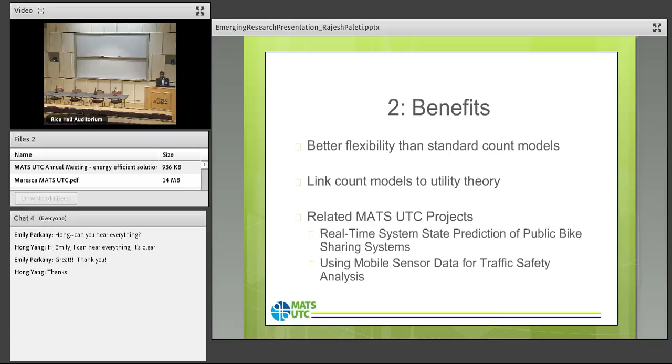One is a bike sharing project that is starting, where we are trying to predict the demand for bike sharing facilities in real time, which is the number of departures at each station - a count outcome. We also use these models recently for developing crash frequency models for the Hampton Roads region and another UTC project that we finished recently.

The last case study I wanted to talk about is errors in survey data. Survey data forms a key component of all travel behavior analysis, but as we all know, it is not accurate. Either unintentionally or intentionally, respondents might provide wrong data. And if you don't account for these intrinsic errors in the survey data, all your model parameters are most likely going to be biased and can then lead to wrong policy implications.

So there is a way to correct for this misclassification error. For instance, let's go back to the example of choosing between a gasoline vehicle and an electric vehicle. It is possible that the person in reality chose a gasoline vehicle, but in the survey response they reported it as an electric vehicle. Similarly, the person actually chose an electric vehicle, but in the survey response it was wrongly coded as a gasoline vehicle. So these are false responses or misclassifications.

You should account for these possible biases and errors in your survey data when you develop models. For example, this is a matrix of misclassification. The diagonal elements in this matrix show the probability of correct classification - so there is no error. But the non-diagonal elements show misclassification. There is a method to retrieve the correct parameters of your models if certain conditions are met.

What are those conditions? The probability of correct classification in the data must be greater than the probability of misclassification. What do I mean by that? For instance, if the actual response observed in the data is electric vehicles, then at least 50% of those responses must be correct responses. If at least that condition is met, then there is hope of retrieving the correct parameters without any bias.

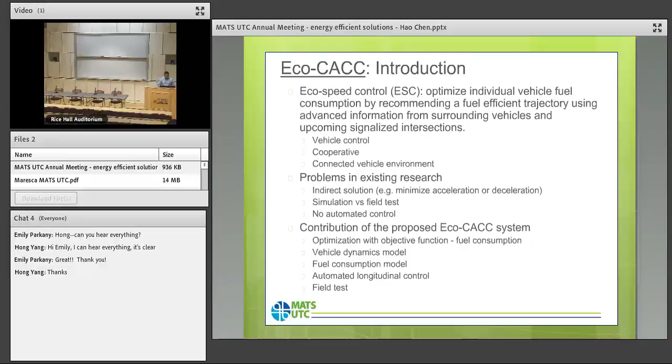For the methodology, we generally divided the scenario into two cases, depending on whether the vehicle approaching the signalized intersection needs to decelerate or not. In case 1, the vehicle doesn't need to decelerate—it can keep a constant speed or accelerate a little before passing the intersection. In case 2, the vehicle has to slow down. This is the focus of this system because it's more difficult to get the solution.

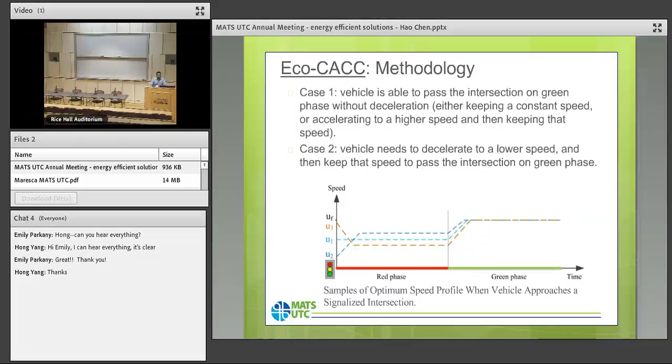We modeled the whole problem as an optimization problem. We have an objective function of fuel consumption, the summation of fuel consumption from upstream to downstream of the vehicle, and we listed those constraints.

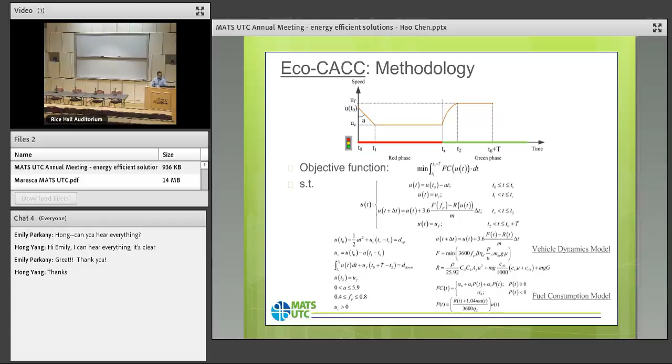I'm not going to talk about the details of the mathematical equations, but generally we have two unknown variables. The first is the deceleration level, which defines how the vehicle will decelerate to a slower cruising speed, and after passing the intersection, the second unknown variable is the throttle level. We use dynamic programming to search the solution space and see all the possible combinations of deceleration level and throttle level to find the optimal solution.

We then implemented the ESC algorithm into the field test. We actually developed this eco-CACC system, an adaptive cruise control system. We considered all the field environment factors, including driver perception-reaction delay, system latency in communication or electronic devices inside the vehicle, as well as data smoothing.

We tested the eco-CACC system on the Virginia Smart Road Connected Vehicle test bed. In this test bed, we have only one signalized intersection, located in the middle of the map, which is a loop. In this loop, we have two directions to approach the intersection, and we considered road grades of positive and negative 3%, which has a huge impact on driving behavior.

So we investigated two directions of driving. For the range to engage the eco-CACC system, we defined 250 meters upstream of the stop bar and 180 meters downstream of the stop bar, for a total range of 430 meters. We define one trip as the vehicle driving through this 430 meters.

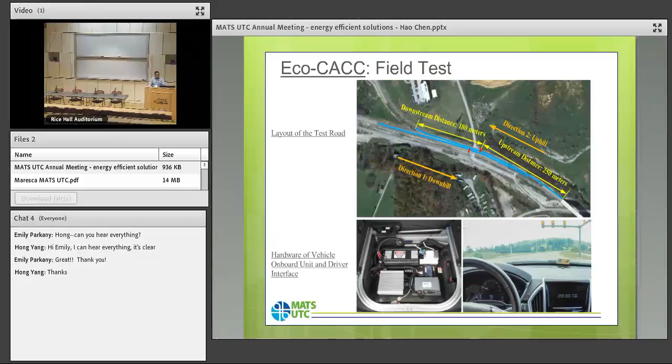We conducted a field test with 32 participants, half male, half female, and each participant completed 64 trips. We considered different combinations of signal timing, with red timing ranging from 10 to 25 seconds, and two directions, uphill and downhill.

We compared 4 scenarios. Scenario 1 is the base case, the uninformed drive. Scenario 2 gives audio information to the driver about the remaining red time of the signal.

Scenario 3 is the eco-CACC manual mode, where we also use audio information to suggest what speed the driver should follow, provided every 2 seconds.

Scenario 4 is the automated driving mode—an automatic vehicle with automatic control of the gas and brake levels. The driver just controls the steering wheel.

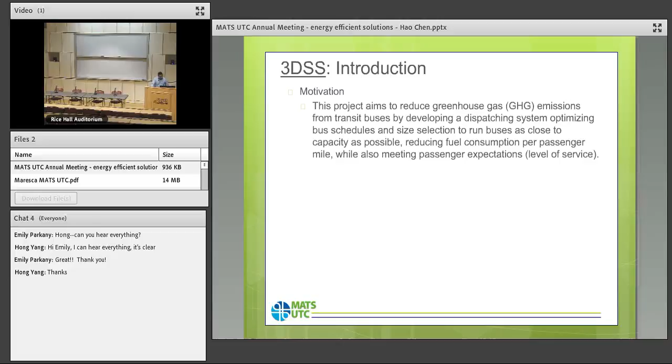The fonts are very hard to see.

We use information to predict how many passengers are going to wait at the bus stop. We use historic data to conduct the prediction, along with bus schedule data, how many buses are available for today's schedule, and how many trippers can be added into the system if needed. We use that information to conduct real-time computation to calculate the level of service.

We provide four different kinds of suggestions: first, adding a bus; second, replace a small bus with a larger bus; third, remove a bus; fourth, replace a large bus with a small bus.

So we provide suggestions to the transit operator. If they decide to accept the decision, it will make a change to the bus schedule in real time.

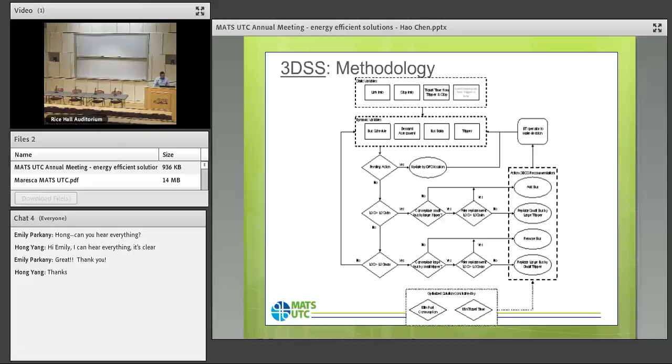We conducted a simulation test because real field tests are very hard—it involves a lot of political issues, since they don't want passengers to suddenly see the bus schedule changed. So firstly, we conducted the simulated test on a bus route called Eastwood A, which is a very important route in VT because it connects the biggest community to the campus.

In the test, we actually used all the field data collected during October 2014, including the bus schedule, ridership data, weather information, and route information—everything.

We divided the test into sunny days and rainy days because performance differs between them. For example, on sunny days generally fewer people ride the bus since they can walk or bike to campus, so the 3DSS is supposed to recommend reducing the bus or replacing a large bus with a smaller tripper to reduce fuel consumption while maintaining the service level. On rainy days it's the opposite, since more people take the bus when it's hard to walk or bike.

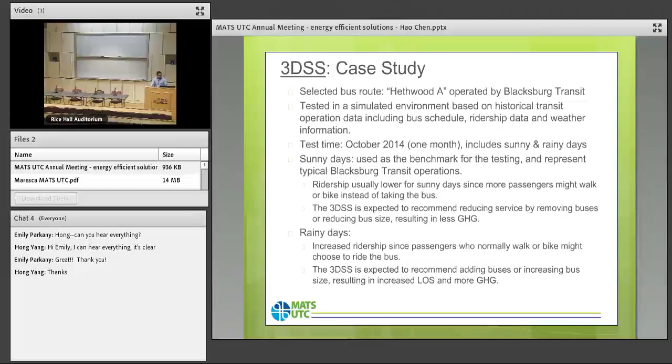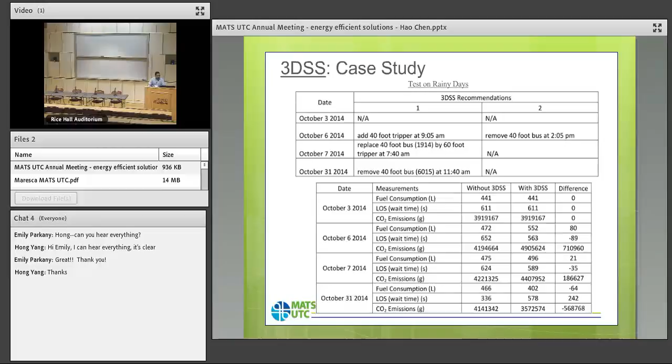We computed the results for fuel consumption, level of service, and CO2 emissions. This is the test result for rainy days—for most rainy days, it suggests adding a bus or replacing a small bus with a larger tripper in order to bring more people from the road onto transit.

For the average result, we got an average 10.6% reduction in fuel and greenhouse gas emissions, while maintaining the service level with average waiting time less than 5 minutes per passenger.

So here we are working with Blacksburg Transit to try to test this 3DSS system on multiple routes in reality, and try to investigate the network impact of the algorithm. That's all, thank you.

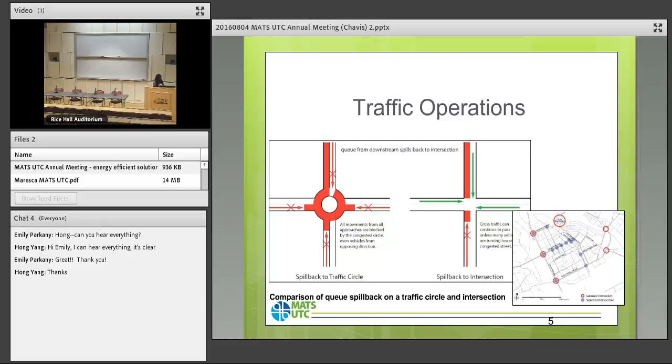I've also, in terms of the macroscopic fundamental diagram, this is kind of a relatively new concept. It had been mostly applied to Western cities, and the reason why it was unique to see if it could be applied to Nairobi is because their street network is pretty limited. And so with the limited street network, there's not a lot of redundancies in routes. So if you're going from one origin to one destination, you don't have a lot of choices in the route that you can take. And so what we wanted to see was, would this even exist in a city such as Nairobi, where there's not a lot of alternative routes?

And so we did this via simulation, and we did indeed find that this relationship exists. The fundamental diagram looks at the flow, or the amount of vehicles you have circulating in your network, as opposed to the total accumulation, or the total number of vehicles on your network. That's a proxy for density. Since the lane mileage is fixed, if you count the number of vehicles circulating in the system, you get a proxy for density.

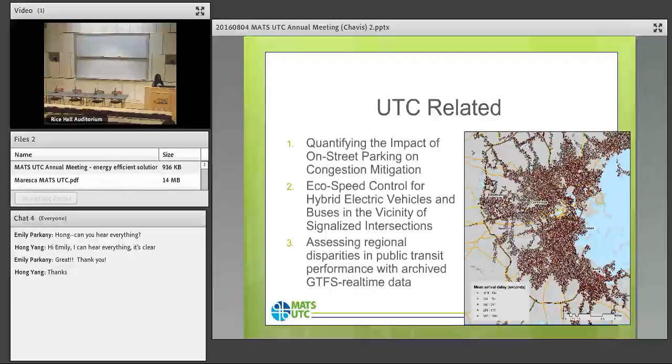In terms of the current study that we're doing, we are doing it with the DC Department of Transportation. If anyone's familiar with the DC area, it's very difficult to park in certain areas. We're looking at the Chinatown area, which is where the Verizon Center is. If you're used to the metro, it's where the red line and the green line have that big transfer hub.

So it's a very busy part of town, and they have been doing a pilot study where they have embedded sensors in the ground at certain places, not 100% coverage, but they do have an algorithm where they can predict the level of occupancy for on-street parking. And so where we come in is how to best relay that information back to the public, with the goal of reducing the amount of time people are circulating trying to find a parking spot.

We're just beginning this project. We're looking at different ways of presenting the information, whether it be through a mobile interface or directly on street through signage. We definitely wanted to look at the on-street side of things because this area of DC in particular has a high amount of tourists, and they may not know about apps that are available to download. So we really wanted to look at ways of disseminating that information to the person who's not familiar with the area as well.

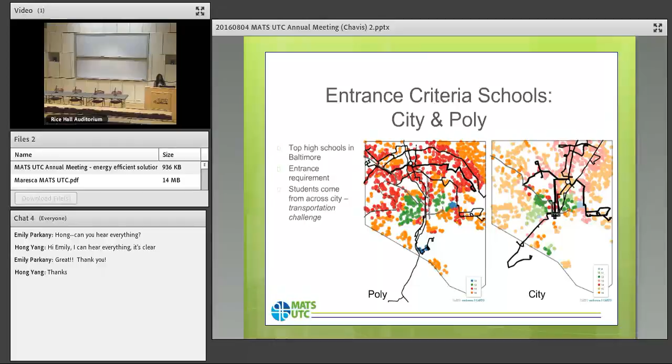So what I've been doing in terms of school-based transportation is looking at how that influences absenteeism. We created a Bayesian model to look at the link between transit accessibility and absenteeism. And we found that, beyond the self-selection of being at an entrance requirement school or not, transportation was a key factor in predicting chronic absenteeism.

In particular, if there was a direct route between home and school, if you come from a neighborhood where there's high vehicle ownership and whatnot.

So back to the question about how the riots happened, why was transportation a part of the riots? Well, the riots occurred right after school let out. And so what happened was school let out and someone made a decision to stop running transit. We don't know who that decision is attributed to, but the decision was made to stop running transit. This happened right when school had let out, and so the students were kind of stuck at various transportation locations.

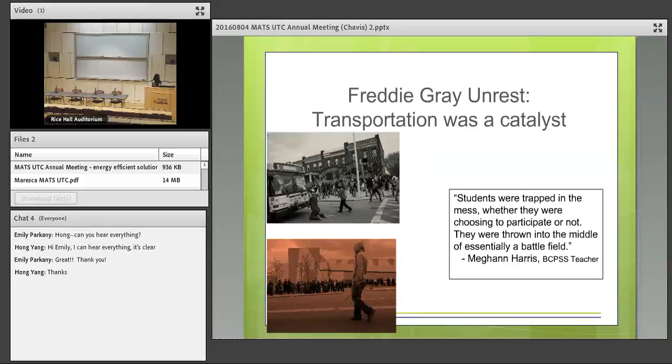So that is where a lot of the students have to go through to get home. There was an abundance of students who were literally stuck, met with a bunch of police, as you see in the bottom left corner. These are all police officers in riot gear, and that's what they were met with at the end of the school day, and they could not go home even if they wanted to.

So that's some of the things that you wouldn't think about, but because students use public transportation, because public transportation was built around downtown-centric jobs, but yet our schools are dispersed across the city, that really puts some challenges on the system, and then sometimes that gets translated into social issues at different times.

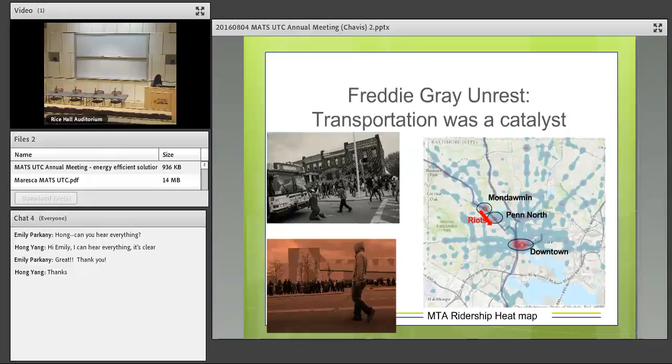So with that, thank you. I kind of just say I'm an engineer with a social scientist hat on sometimes. I hope that it was a bit thought-provoking and you got some interesting ideas. And as they say in Kenya, asante sana, and I'll take questions later.

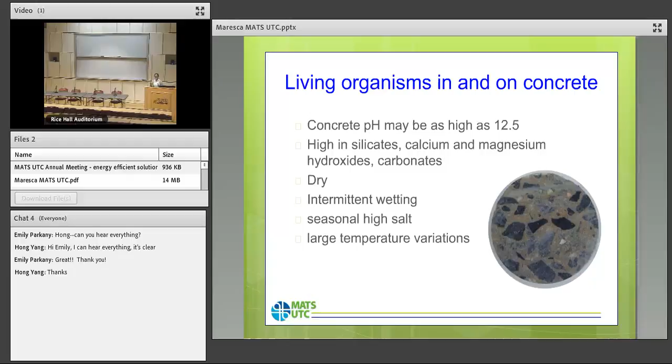They withstand really big fluctuations in wetting, right, when it rains, in salt content. So we salt roads like crazy in the winter, right? And so they have to be tough not just for conditions that are there all the time, like the pH, but also for things that change rapidly on short time scales. So anything that's living in concrete has to be really tough to survive in there.

So, okay, I thought, well then, that's just too hard. There's nothing that lives there. Then I went for a run. And as I was running... okay, I take it back. I went for a run, and then later I said, okay, I can take pictures to illustrate this principle. So I went for a run with my camera, and I said, okay, I see some organisms on concrete, right?

Let's start looking. So it really raises two questions, right? Do the microbes in or on concrete change as that concrete changes? Because the chemistry of concrete will change as it ages. And then if they do, can we use them to tell us something about that concrete structure?

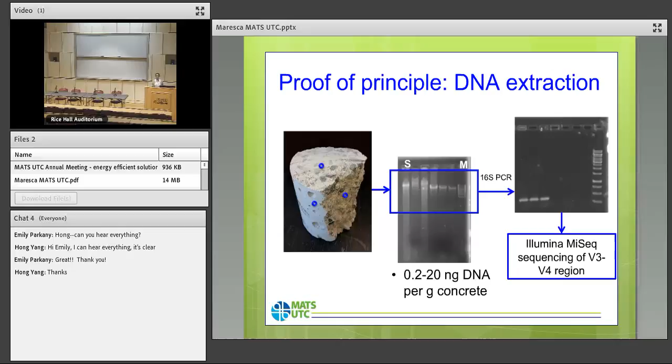So for our proof of principle experiments, we compared what's on the top surface of a concrete cylinder that was outside to what's inside. We really want to know what's inside that concrete, because that's really going to reflect the chemistry of what's going on inside, and not the weather.

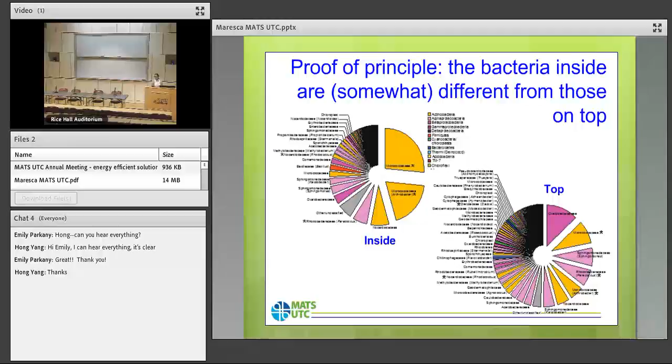So this tells us, one, that there are bacteria in concrete, two, that there's a lot of kinds of bacteria in concrete, and three, that we can analyze them using DNA analysis. So this is really good.

The other thing I was concerned about is that with this kind of sequence analysis, especially if you want to identify things you could use as bioindicators, you want to make sure you're seeing everything there is to see in that sample. In high diversity environments, where there's a lot of different kinds of organisms, you might not be able to sample everything.

This is also helpful. So I told you that I wanted to do structural health monitoring, to use these things as bioindicators. But to do that, you really have to set up a controlled environment where you're comparing two things that are similar to each other.

So what we did in 2013 was get materials from the Delaware Department of Transportation. I told David Dodd there, I just want something that's going to crumble from ASR as fast as possible. He said, are you sure? I said, yes. So he gave me some really reactive materials to work with.

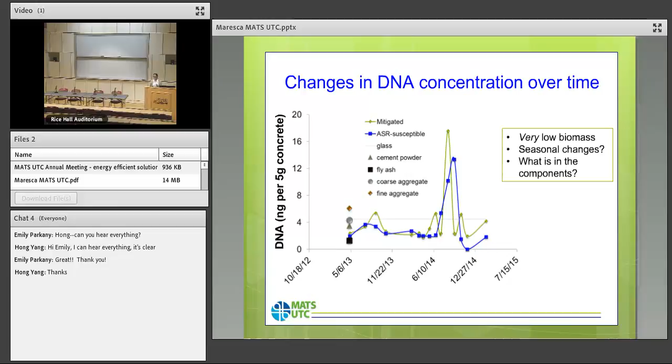One question I get a lot when I give this talk is, where do those bacteria come from? The things on the surface, I'd say many are coming in from rain or atmospheric deposition. But the ones inside are probably coming in with the materials, on the aggregate or the cement powder when you mix it. Nobody sterilizes that stuff when they mix concrete. So we've extracted DNA from all the components used to make our test cylinders to compare those populations and see how they correlate.

So that's where we're at right now. These are my conclusions, one more slide after this. The DNA-based analysis of bacteria in concrete is feasible.

What that means is we can apply this to any other system. We're using ASR as a test system now because it was pretty straightforward, but people interested in other types of damage or other types of concrete, like pervious concrete, could also use this. So if you're interested in collaborating, I'd be happy to do that — please come talk to me.

Let's see, what else can we say? Bacteria in concrete and on the surface are generally comparable — those populations are similar. They're not the same as you'd expect, but similar. This community is actually very similar in composition to what you find on things like rock surfaces. There's been a lot of work done on bacteria that live on stone monuments, and we see a lot of similarities to those.

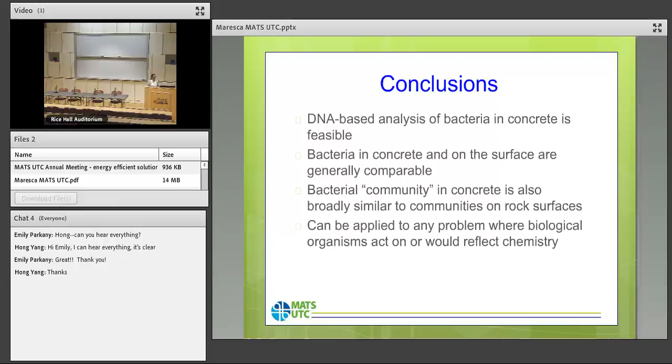So what's next? We're going to sequence the samples from the time series. We now have all that DNA, and we're going to send it off and get a ton of data back in about a month, I hope. Then we'll look for trends related to the treatment, the age, the season, and anything else we can identify. What's going to be really important, if we want to turn this into a functional applied system, is comparing the predictions we make in the lab to field samples.

One of the reasons I was really glad to give this talk today is so I can tell everybody: send me concrete. I really think comparing what we get in the lab to what's in the field is going to be critical.

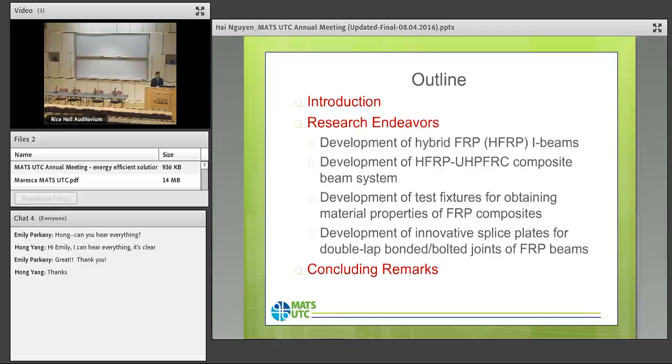FRP, or fiber reinforced polymer, also known as fiber reinforced plastic, is a composite material composed of a polymeric matrix reinforced with fiber. The main function of the fiber is to carry the load and provide stiffness, strength, and other properties in the composite. The important function of the polymeric matrix is to bind the fiber together and also transfer the load to the fiber. We can also add fillers and additives to the composite to provide a good surface finish and to protect the fiber from chemical attack.

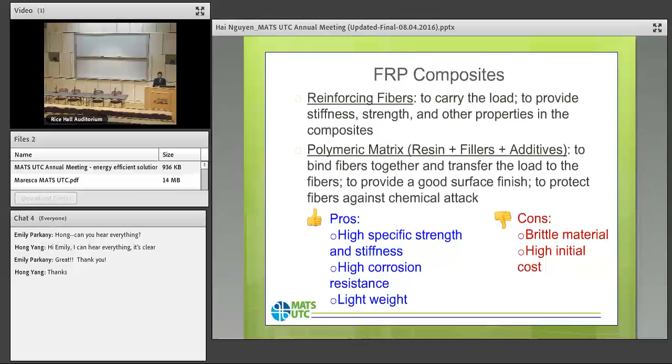So what are the advantages of FRP composite? It has very high strength and stiffness, high corrosion resistance, and especially it's a very lightweight material. However, it's a brittle material and it has a high initial cost, especially for carbon fiber. Also, there are still lacks of standard specifications and codes for designing FRP related structures.

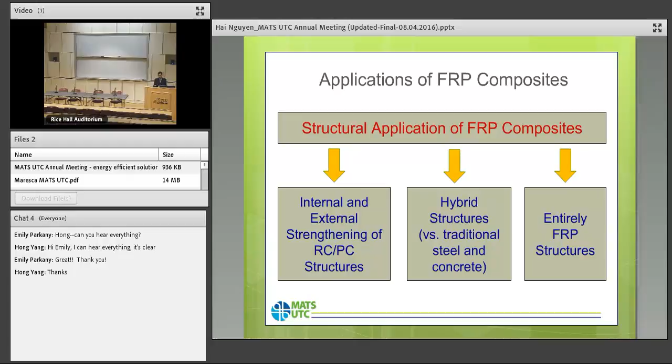FRP has been used since the 1940s, and it has been applied in different sectors such as aerospace, automobile, marine, sport goods, etc. In the field of structural engineering, FRP has been used for internal and external strengthening of reinforced concrete and pre-stressed concrete structures, for hybrid structures in combination with traditional materials like concrete and steel, and for fully composite structures.

In the US, internal FRP reinforcement has been developed since the 1960s. Low-cost GFRP fiber is usually used for non-pre-stressed applications, while high-strength carbon and aramid fibers are preferred for pre-stressed structures. It can be used for cables or for pre-stressed tendons.

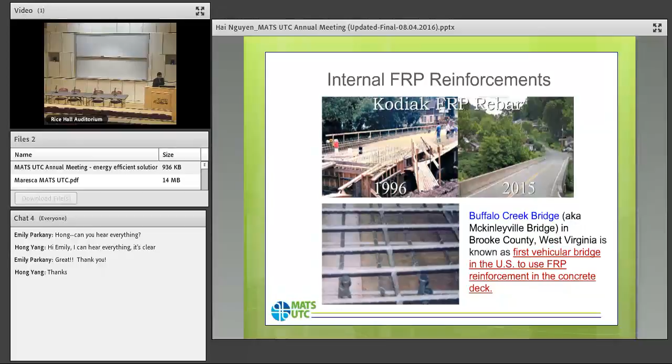It seems to be stuck. Oh, sorry, leave it, yeah.

External bonded FRP reinforcement has been successfully applied for the flexural and shear strengthening of reinforced concrete and pre-stressed concrete structures. You can see in this photo the flexural strengthening of a reinforced concrete girder using CFRP laminate, and on the right-hand side, the strengthening of a concrete column using FRP wrap. The typical types of FRP, including FRP strip, FRP fabric, and FRP sheet, are usually used for external application.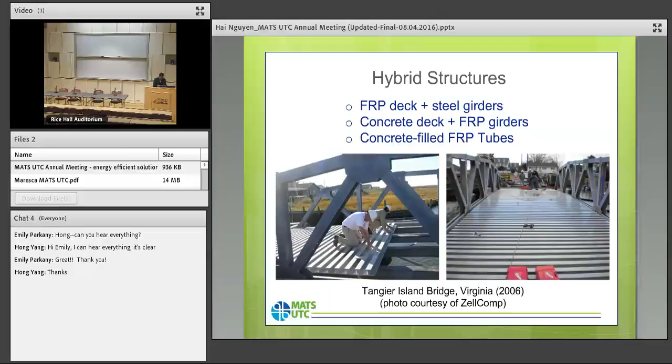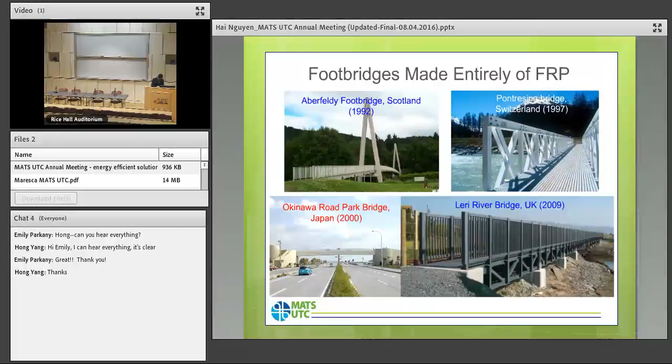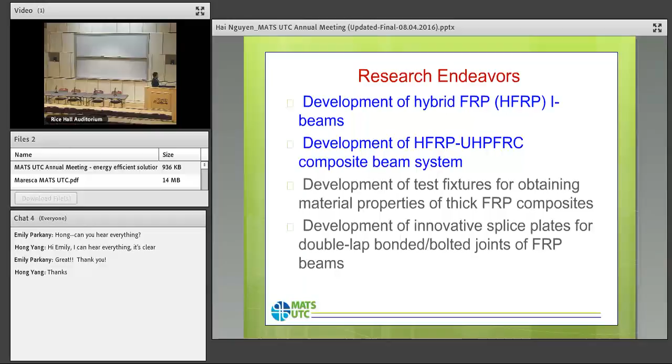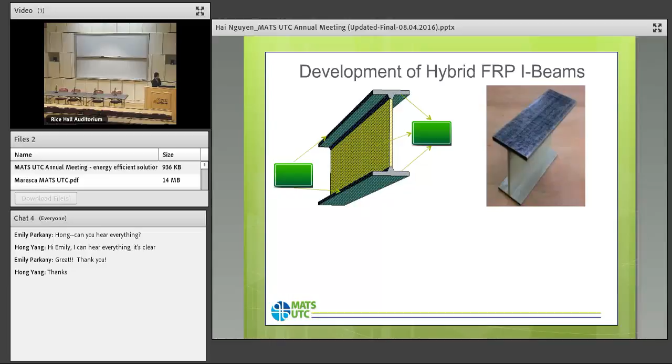So we have developed an I-shaped FRP girder. For some reason it's not shown here, but we use carbon fiber in the flanges where larger stress is concentrated, and glass fiber in both the flanges and the web to reduce construction cost. Here is the actual view of the FRP beam cross section, and we use a pultrusion process to manufacture this beam. Here's the dimension of the I-shaped beam.

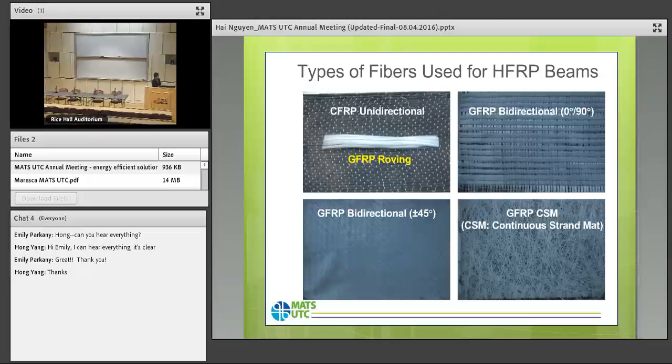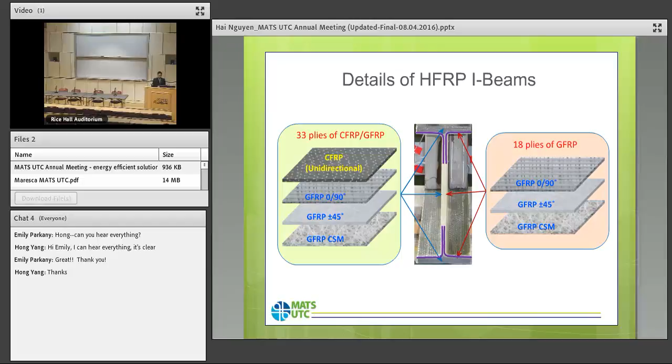We use different types of fiber, including carbon FRP unidirectional and GFRP bidirectional, both 0/90 or plus minus 45, or other types such as glass fiber continuous strand mat. In the FRP beam, we use multiple layers of CFRP or GFRP, which we call plies, in the flanges and the web. You can see some GFRP were extended from the flange to the web laminate to provide continuous fiber across the flange-web junction, which results in strength improvement for the FRP beam.

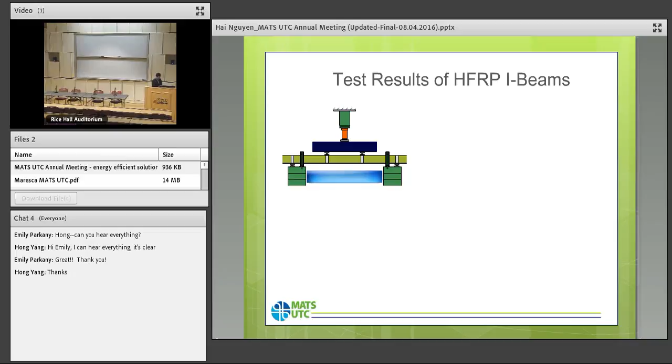We have conducted, I believe, more than 20 large-scale tests under 4-point bending. We found that the typical failure mode of the FRP beam is delamination of the compression flange followed by crushing of the web.

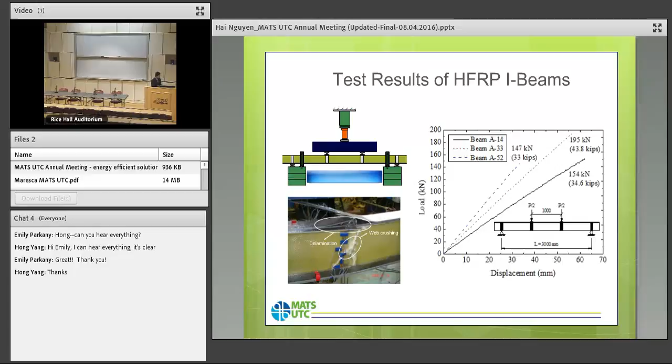I will skip this one because it's too technical and time consuming.

Okay, so I would like to show you a movie showing the failure mode of the FRP beam. This movie was recorded by a high-speed camera. Okay, so it's not working. I'm sorry.

Going to the next slide. The developed FRP girder has been successfully applied to a demonstration pedestrian bridge in Hiroshima, Japan. This bridge is located in a coastal area where many structures are susceptible to corrosion due to chloride attack by seawater and airborne sea salt. This bridge is intended to replace a deteriorated bridge.

You see here, this type of bridge is very popular in the fishing ports in this area. This beam is simply supported between the pontoon on one side and the concrete deck on the other side. It includes 2 HFRP beams topped with GFRP grating, as you can see here.

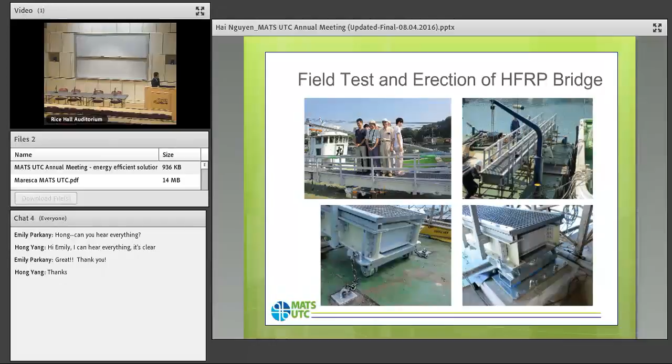You can see here, on the pontoon side it's a roller support, and on the deck side it's a pin support for this bridge.

Based on previous study, it shows that the FRP beam should not be subjected to high stress on the compression flange. So the idea is it's better to set the neutral axis of the FRP beam toward the top by providing concrete on top of the FRP beam. In this study, we use ultra high performance fiber reinforced concrete, or UHPFRC. The UHPFRC has very high tensile strength and durability, which allows for reduction of cross-section. This reduction results in a lighter structure, and the benefits of lightweight structure include faster construction, smaller foundation, savings in cost and labor, and some studies show it can also benefit CO2 emissions to the environment.

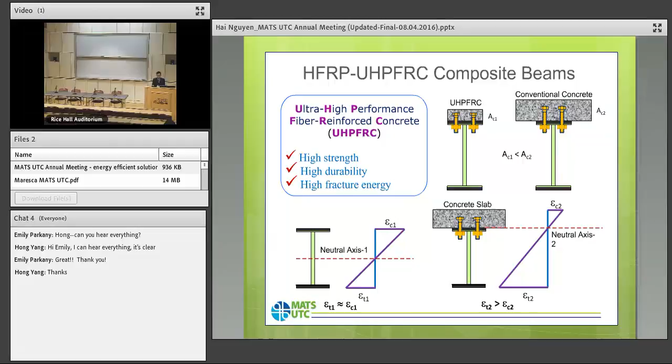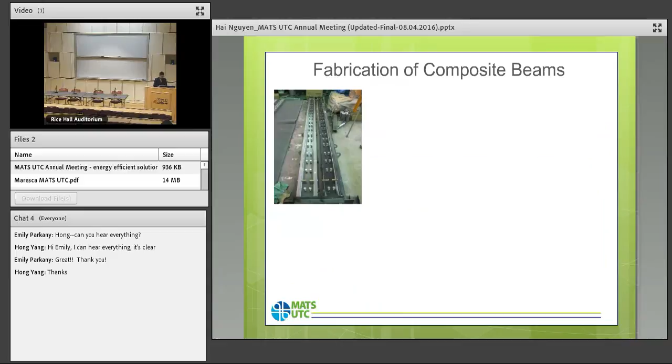Based on the results of our study of FRP-UHPFRC, we applied the results to an actual bridge in Miyagi, Japan, an area hit by a massive earthquake in 2011. At that time I was there, about 200 miles from the epicenter, but I still felt very strong shaking of the building. This bridge includes segmental UHPFRC, with connections between segments using either epoxy or high-strength mortar. In this case, we use two GFRP girders topped with the UHPFRC segmental slab.

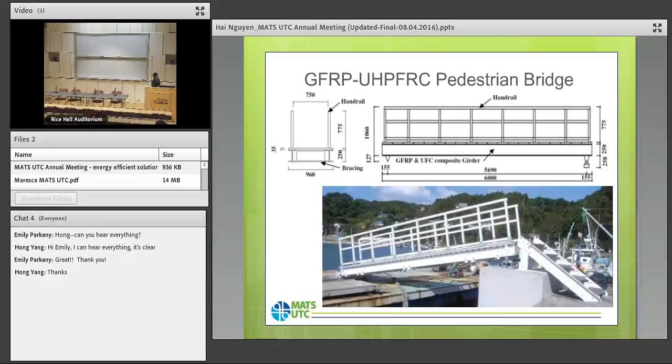Here are some conclusions from this study. Although the design of the HFRP I-beam and the FRP-UHPFRC composite beam is governed by beam stiffness and deflection rather than strength, the developed beams are promising for application in short span, pedestrian, and vehicular bridges. The second conclusion is that the developed beams can also be used for enhanced durability in structures, as FRP composites and UHPFRC are very durable materials.

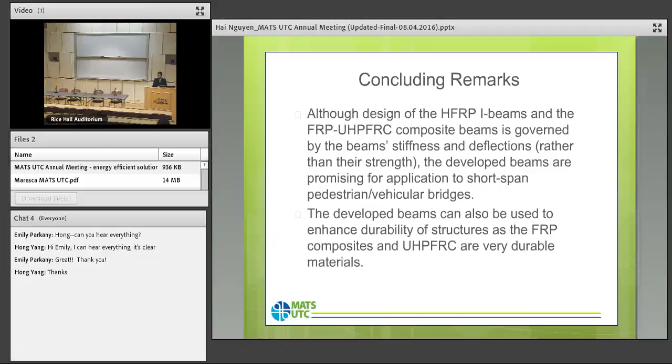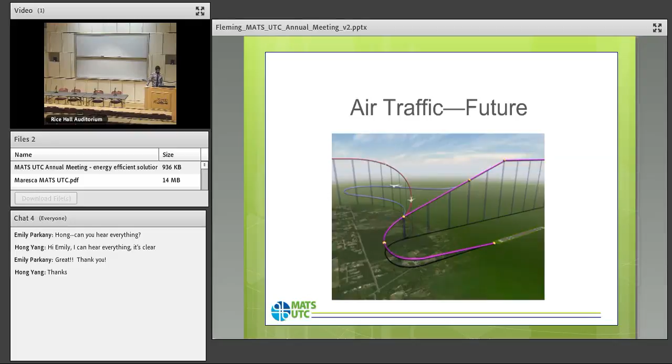So this is a future version of air traffic control, and a lot of the decision making is going to be decentralized. Instead of a controller in front of these screens acting like an oracle telling everyone what to do, there'll be some sense of negotiation between the various agents in the system, all done automatically. All the information shared, satellite information, route information, stuff going on the ground, the terminal en route, will be shared so that everyone can have it, which if you're into cybersecurity should scare you a little bit. It scares me.

There are too many challenges to list, but I'm doing some work in this area. One is that the system was really decoupled before, which made the complexity easier to manage. It's becoming increasingly coupled. There's going to have to be a lot more reliance on automation. We don't think in 4D, so I can build a 4-dimensional trajectory, and then you have to execute it. It's got to be done by automation. And then increased distribution of decision making—it could be the aircraft themselves that negotiate with each other and decide what to do, instead of a controller telling.

This is an interesting line of work. I don't have any results in these slides—more open questions. You could think of a million more challenges if you thought about these problems long.

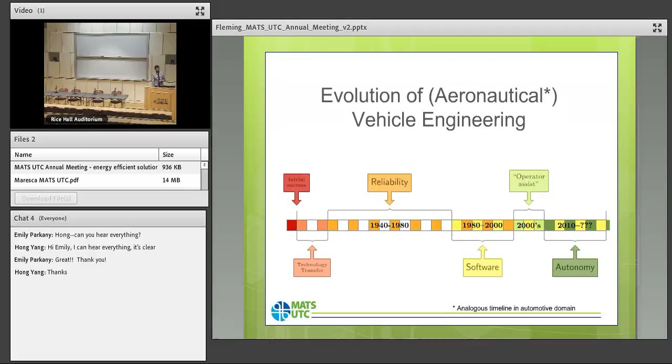We're going from sort of operator-assist technologies all the way to full autonomy. And how do we prove that these things are safe? It's different than the mechanical reliability problem—you're talking about software now. But does the software do what it should, when it should? We're seeing issues with that. Everyone knows about the Tesla accident. That's actually in this realm here, the operator assist. So really, when we're thinking about safety now, it's a software problem and a decision-making problem and a design problem, and not just a mechanical reliability problem.

So the point is, the software always ends up at the sharp end of the process. We come up with these cool things we could do,

but then it requires software to do it, and to make it safe requires even more layers of complexity. So that's why software is important to you, especially if you're into real-time transportation management. It's not just making sure the code is correct, but at a conceptual level, the operational concepts actually drive the type of software you have to design and how complex it is.

Switching gears a little bit, this is just an interesting problem I think. On one hand, we have a smart car. This is like what Google's doing. We're going to just sense and perceive and predict the world and then act accordingly. So I call this a smart car. This is actually a snapshot of what the Google car sees.

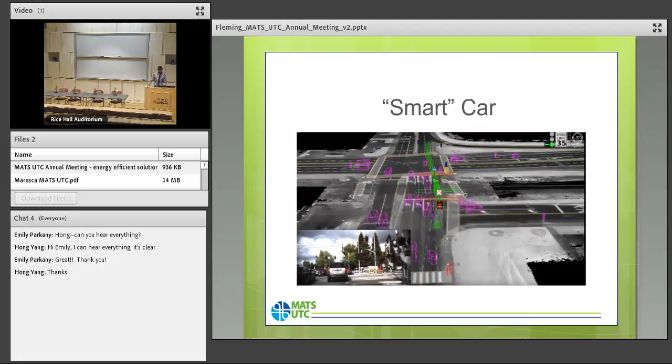Vehicle-to-vehicle communication, which people in the audience work on. So the cars talk to each other, and there's some sense of collaboration that way.

Then there's the enthusiast. You can imagine in the year 2050, Brian's still driving around his 2016 Porsche, and it doesn't have any of these features, right?

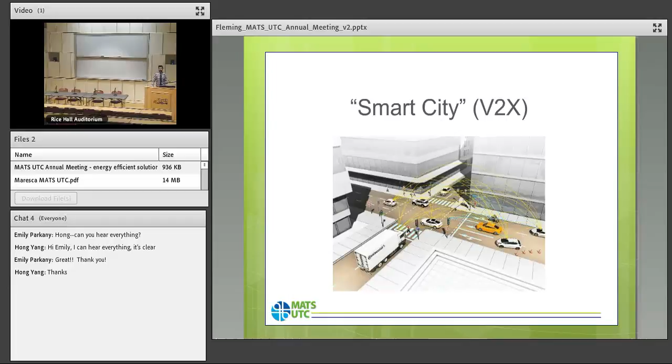The smart city - so we're not only communicating between cars, but we're communicating to the infrastructure. All these are really awesome. I'm not promoting any one over any of the others. What's interesting is what happens if all these come to fruition. How do these systems interact with each other?

One thing that's kind of interesting is we're investing a lot of money, both privately in the industry and in the government. You can imagine investing a ton of money in V2X, developing an infrastructure to talk to cars, and then Google wins, right? We waste all our money going down this path when really this is the best way to go. And there are all these other scenarios.

I'm interested, at a systems integration level, in what types of behaviors actually arise when you have all these systems. And again, there are many questions.

Takeaways for me are that software is everywhere, and even though we are in a computer science building right now, it's still relevant to anyone doing anything in real time, anything that's safety critical. It's everywhere. It's not necessarily that everyone has to learn how to write perfect code, but I think we need to understand that whenever we decide to do something with physical systems, it has an impact on the software design itself.